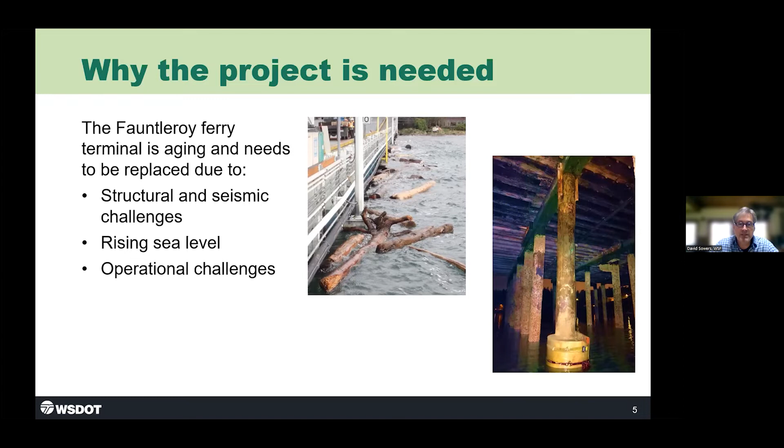The terminal is one leg of the Triangle Route, which you all know, serving West Seattle, Vashon Island, and Southworth on the Kitsap Peninsula. And it is also one of our busiest routes. It serves about 3 million riders pre-pandemic. I mentioned the dock's capacity. The vessel capacity serving this route is about 124 cars. It's an Issaquah class boat. You're all familiar with that since you're all ferry riders. It serves about 29 to 34 sailings per day between Fauntleroy and Vashon Island, and about 23 to 27 sailings per day between Fauntleroy and Southworth. So it's a very, very busy route, as you all know. Because these communities are projected to grow over the next several decades, we are also looking at how to make this terminal as efficient as possible in our concepts for replacement.

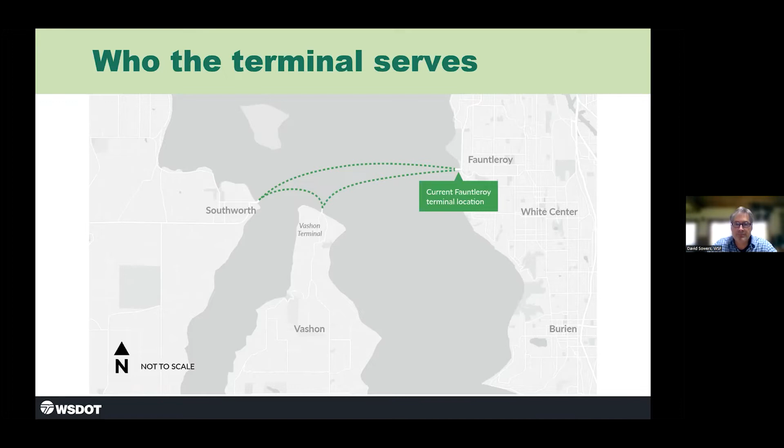Okay, so this process started several years ago with a very public process to gather input on the Triangle Route. And through that process, we identified some near-term improvements, including a new sailing schedule, and got information that fed into that 2040 long-range plan. In 2021, we launched this project with community meetings, and we formed 3 different advisory groups: a technical advisory group, a community advisory group, and an executive advisory group. Since then, we've been working through a planning study process, called the PEL process. I'll describe that one a little bit more. And we don't expect construction to really begin in earnest until, at the earliest, the 2025 to 2027 timeline.

But in the meantime, we are looking forward to your feedback because it's all part of this process and coming up with the best alternative that fits into the route the best. So let's talk a little bit about this planning process.

It's called a planning and environmental linkages study. It's a fairly new concept that the public agencies are using to help identify alternatives before they go into the more formal NEPA-SEPA environmental process. It helps us develop high-level concepts for replacing the terminal and narrows down the range of concepts, we call them alternatives, to further study in this environmental review.

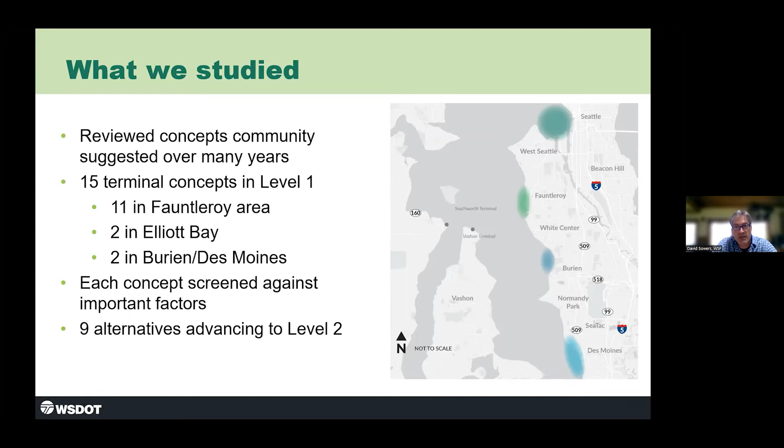We evaluated how well each of these concepts meets the project's purpose and need, and other key considerations that our community and technical advisory groups helped us identify. So again, none of this was done in a vacuum; there was a lot of input from the community and a lot of input from our technical advisory group members. So let's talk about what we considered. Well, we talked a little bit about the operational needs. We talked a little bit about the structural and seismic deficiencies and sea level rise.

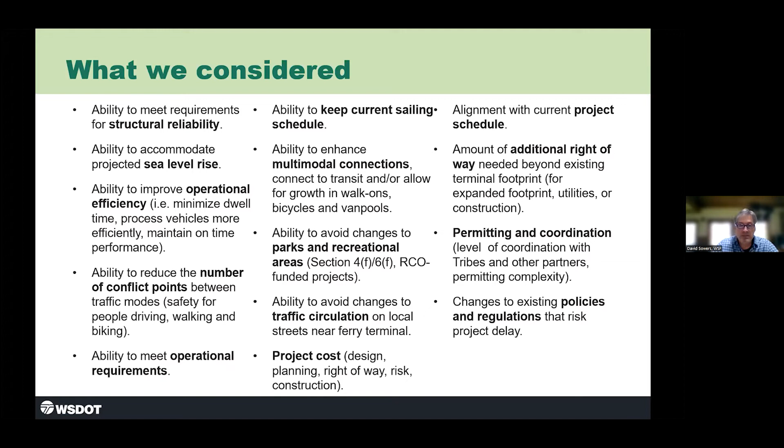But we also took a look at other basic needs, including how the project may impact parks and local traffic flow, how challenging it would be to get a permit, and the types of issues that could come with those various alternatives in the permitting process. And then we also added as one of our screening criteria, project costs and potentially the need for additional right-of-way. Those are all important considerations as we move through this alternative selection process.

So we don't want to spend time or money studying concepts that had 3 or more red boxes as part of the project. They just don't fit enough of the criteria. Those labeled A through C, we plan to study more and refine in level 2 to find the ones that are going to best serve all 3 communities, the ferry riders and the terminal neighbors.

So here's a list of the concepts that we will be studying more in the next phase of the project. I talked about level 2, and we're going to walk through each of these in a little more detail. First, you will note that all of these options reside at the current terminal location. And we'll talk more in a minute about the ones that we're not going to look at.

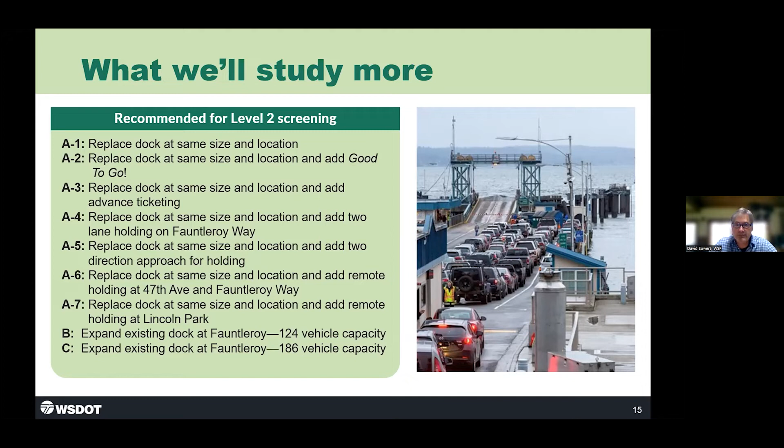Okay, so let's talk about those things that we won't study more. And these are the 6 that you saw on the previous matrix on the right-hand side. For one, moving the Fauntleroy Ferry Terminal outside of West Seattle drastically increases sailing times and decreases the frequency of the sailings, reducing the amount of ferry service to Vashon Island and Southworth, right? Changes our overall capacity of the route significantly.

Moving the terminal to South Lincoln Park or to Lowman Beach required purchasing more right-of-way, reconfiguring the local streets to create ferry access and provide fewer connections to transit. Again, all these things were going to have a significant impact on the ability to operate the terminal, and the impact on parks was also significant due to the amount of permitting that we'd have to do.

Bringing an additional 3 million riders per year to downtown Seattle at Colman Dock was a suggestion, but would slow our ferry service for all riders, and it would require extensive coordination and rewriting schedules to Bainbridge and Bremerton to accommodate all that additional traffic downtown. So these factors in Southwest Elliott Bay, Burien, and Des Moines would increase the overall project cost as well. They would affect our schedules and require extensive permitting coordination with multiple partner agencies.

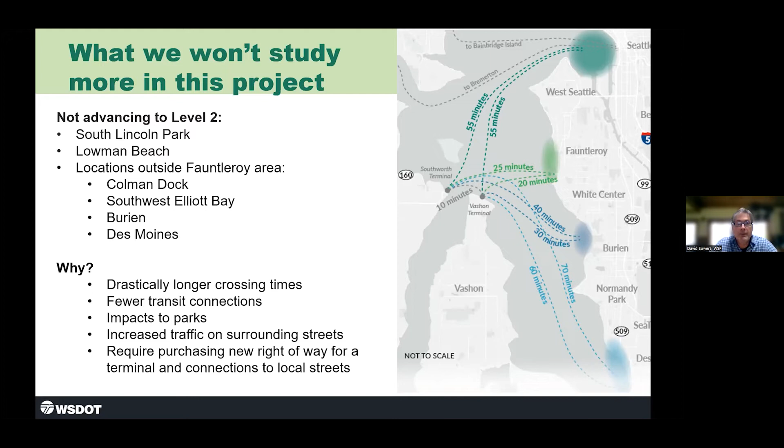So with that, I'm going to turn this over to Mark Bandy, who's going to walk through some of our alternatives in more detail. Great, thank you, Dave. So I'm going to talk through each of the alternatives that are progressing forward in just a bit more detail and talk about what we found.

So let's begin with alternative A1. This replaces the dock at the same size and location as the existing terminal and holds 80 vehicles, with the shoulder holding lane the same as it is today to accommodate up to the 186 vehicle number. And what we found is this alternative meets many core elements of the purpose and need, but may not improve operational efficiency beyond how it's operating today.

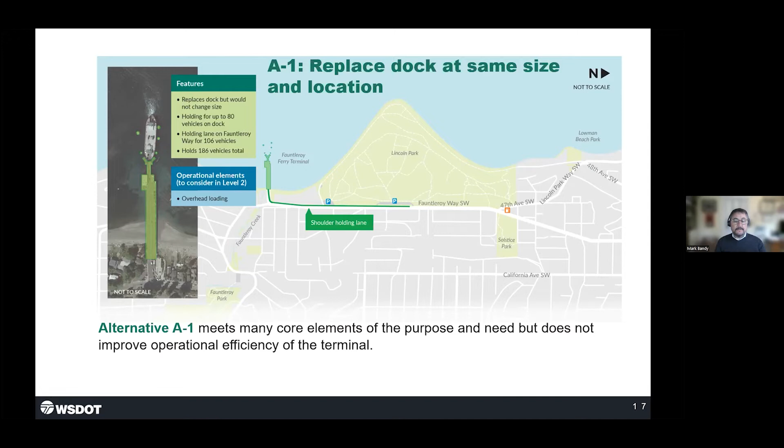This is alternative A2. Again, we're replacing the dock at the same size and location as the existing facility, and this one includes Good to Go to improve operational efficiency. And there are many ways that Good to Go could be implemented, each with different implications. We don't yet have the details to share on how Good to Go would be implemented. That's part of what we'll be looking at in the next phase of this study. What we do know is that the implementation of Good to Go and related changes to fare structure and the program could affect or delay the project schedule.

This is alternative A3. This is, again, same dock size as current, and this one adds some form of advanced ticketing system for operational efficiency. Again, Washington State Ferries would need to evaluate the potential benefits and impacts that an advanced ticketing system would have and request authorization to change the fare collection process to support it. That process and policy change is something similar to Good to Go that could delay the project schedule.

Alternative A4 is again here at Fauntleroy, same dock size, but this one, to increase efficiency, converts the southbound lane on Fauntleroy Way to a second holding lane, and as a result would make the remaining lane on Fauntleroy one-way northbound. You can see it on the graphic with the arrows. The idea is to provide two lanes for separate destinations. This proposal would affect circulation in the area and require coordination with the City of Seattle as well as the community.

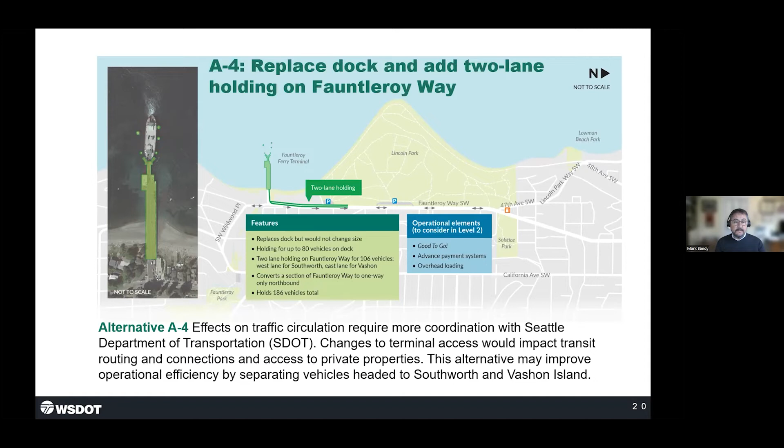Alternative A5 supports vehicle processing through a different means by having traffic headed to destinations come from different directions. So vehicles traveling to Vashon Island would line up along Fauntleroy Way, and vehicles headed to Southworth would access the terminal from Southwest Wildwood Place. Similar to the previous alternative, this would change traffic circulation in the area, again requiring coordination with the City of Seattle, the transit agencies, as well as the community and neighborhoods in the area. And importantly, it's not clear whether a holding lane on Wildwood Place would leave sufficient room for transit to continue to operate.

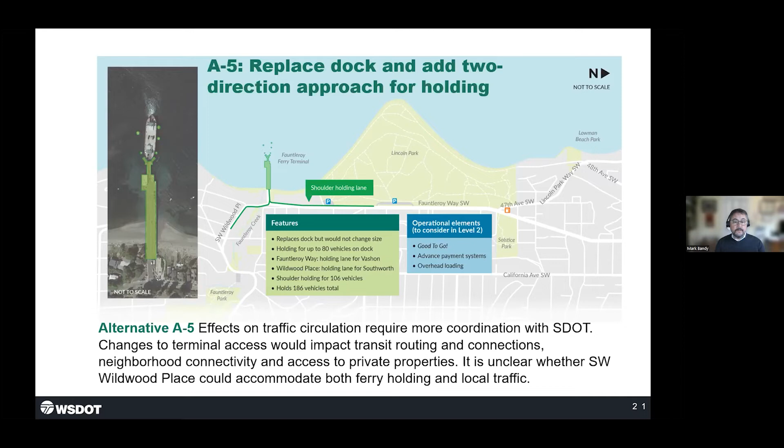Alternative A6 is a concept that adds a remote holding lot near 47th Avenue Southwest. You can see it on the right side of the graphic, rather than along Fauntleroy Way. This requires coordination with the City of Seattle to modify the traffic circulation. It also would require purchasing additional right-of-way to build the remote holding lot. And then, of course, Washington State Ferries operational changes on how vehicles are managed at the terminal and the remote holding lot.

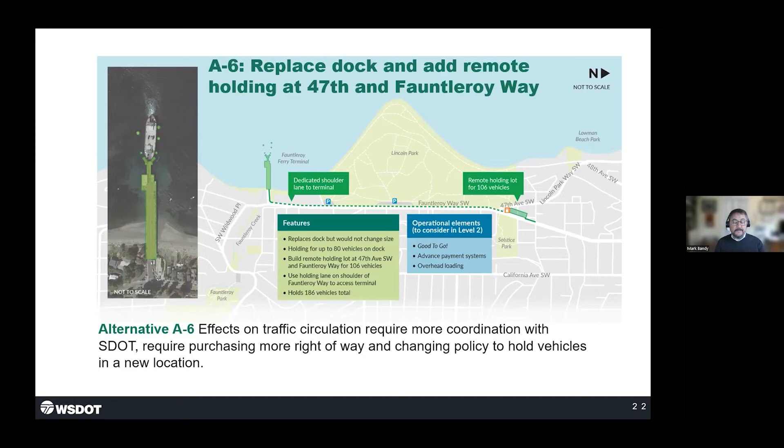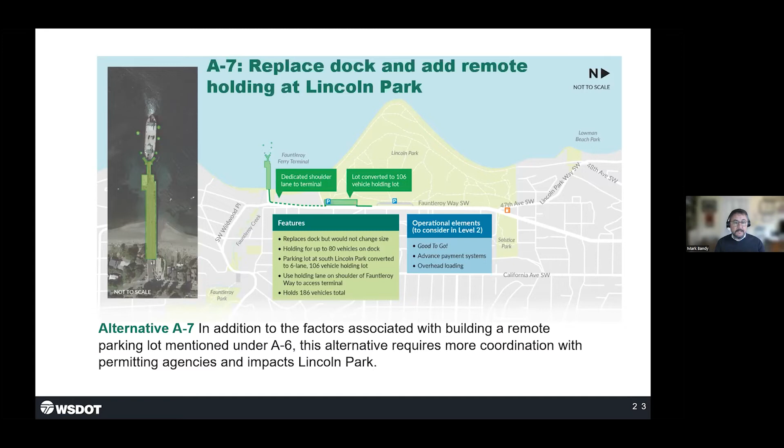Alternative A7 also has a remote holding lot. In this case, it's using the existing south parking lot at Lincoln Park. In addition to the factors that were just mentioned on the previous alternative A6, this also requires more coordination with Seattle Parks and permitting agencies, as well as a discussion with the community about impacts to Lincoln Park.

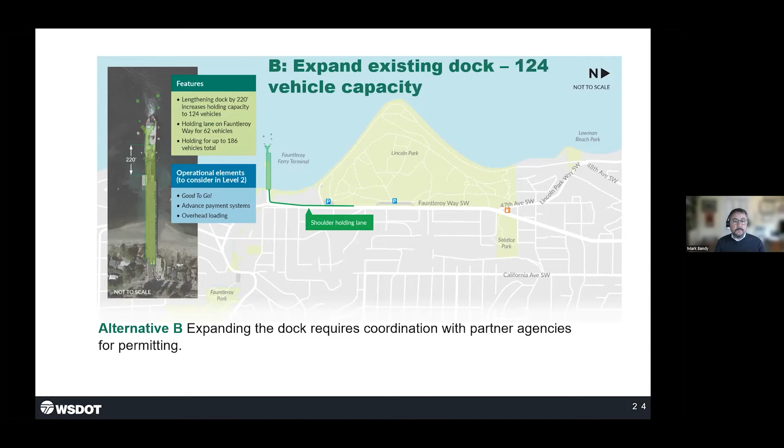Alternative B is an expanded dock. This dock replaces the current terminal with a longer dock that could hold up to 124 vehicles. Expanding the dock requires more coordination with partner agencies and tribes, and it would likely entail some more complex permitting that could affect the schedule.

And Alternative C is again an expanded dock at the current location. This is expanded to 186 vehicle capacity on the dock. In addition to extensive permitting discussions, this would require coordination with the King County Wastewater Treatment Division over utility impacts, as well as near shore width, and Cove Park is identified on the slide. And with that, I think I'm handing it back to Lauren.

Yeah, thanks, Mark. So Hadley Rodero, our Ferries community engagement lead, will read your questions aloud for the project team to respond to. I don't see a lot of questions in the Q&A box. I know we just threw a lot of information at you. So if you have questions or comments about what you saw, if there's anything that didn't make sense, that you don't understand, this is a great time to ask that now. Yeah, thanks, Lauren. Go ahead and type your question in the Q&A box and send it to us, and then we'll have our panel of project team members answer the questions.

So while we're giving you time to think about it, I'm going to pose a question that's come up a lot in our online open house, where we've been collecting comments for the last few days. So Dave, there's been a lot of comments so far about interest in adding a second slip at the terminal. Right now, there's room for one ferry to dock at the Fauntleroy terminal. Have we considered adding a second slip there?

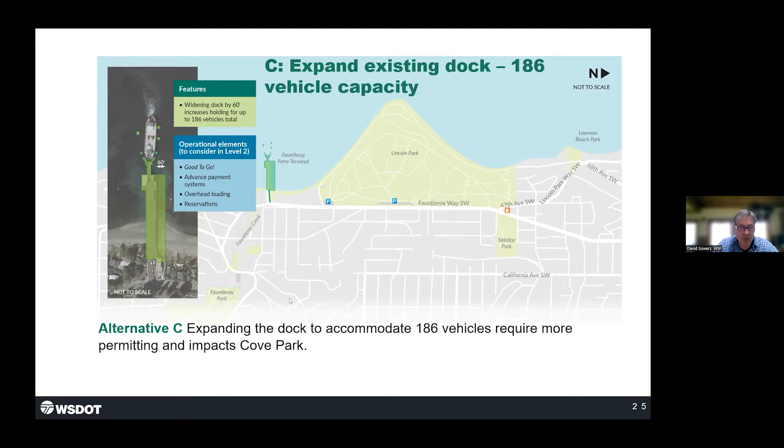Yeah, that's a good question. And Hadley, that is not part of the current project, but it's certainly something that we're going to explore in terms of maintaining operational efficiencies at the terminal. Similarly to overhead loading, we've gotten that question a lot. Those are not things that are currently in the plan. We do have multiple slips on Vashon, and we also do have a project program to add a second slip at Southworth. So we would have to weigh that as part of this project and decide whether we could permit it, whether we had the budget for it, and whether it would help us operationally.

Okay, thanks, Dave. So we have a couple of questions here about Good to Go, which Mark and Dave mentioned at the beginning. Why would implementing Good to Go delay the project schedule? Why could it slow down the process?

Well, I'll start, and then maybe Mark can add some more of the technical stuff to it. One, the Good to Go process is not something that Washington State Ferries has implemented. It's something that you all use when you're on Highway 405 or go through the SR 99 tunnel, but it hasn't been implemented. And so we're looking at it, we're thinking about it, we're talking about studying it, but the implementation of something like this would take some effort.

And so we'd like to look at that in concert with our other planning and design efforts and see if it would be a good fit for this terminal and how we would incorporate it into not only Fauntleroy, but our system wide. Mark, do you have anything else you want to add? Yeah, just a couple things, Dave, thanks.